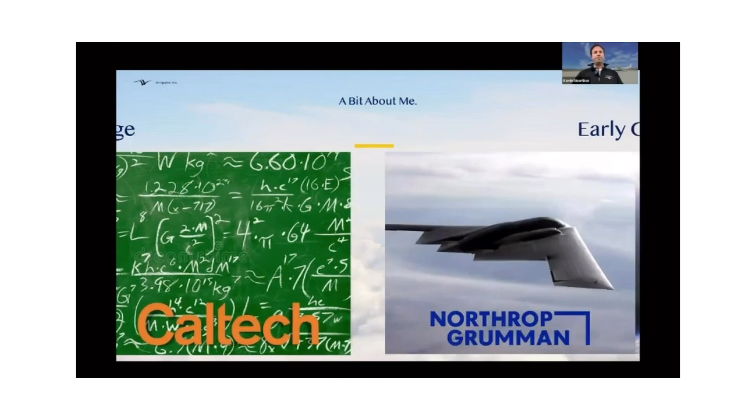As Panos mentioned, I started my career at Northrop Grumman. After doing research at NASA's Jet Propulsion Laboratory, Northrop invited me over to do stealth technology work. Think about the B-2, but 30 years more advanced, the types of making airplanes invisible. It was magical, like Arthur C. Clarke's laws of technology, indistinguishable from magic because it is so advanced. I loved that. It was a great place to start, a lot of responsibility. But ultimately, I felt it was a little bit too niche and limiting to where I wanted to be, the impact that I wanted to create on the world.

After turning into a program manager and exposing myself to the space side of Northrop, I decided to start a company, which was 9 years ago that we started Ampaire, and is still where I today am the co-founder and CEO. Ampaire has a big vision for the future of aviation, the future of sustainable flight, and I've got some very strong opinions on how we're going to get there. Currently, the company has a good 9-year track record for executing on that.

But it all starts with, the Simon Sinek, like the why. Why are you doing something? I think it's really important to find those core values in life, those things you're willing to commit yourself to in spite of the world pushing against you, because that's where you have the resiliency and the tenacity to actually get through the hard times.

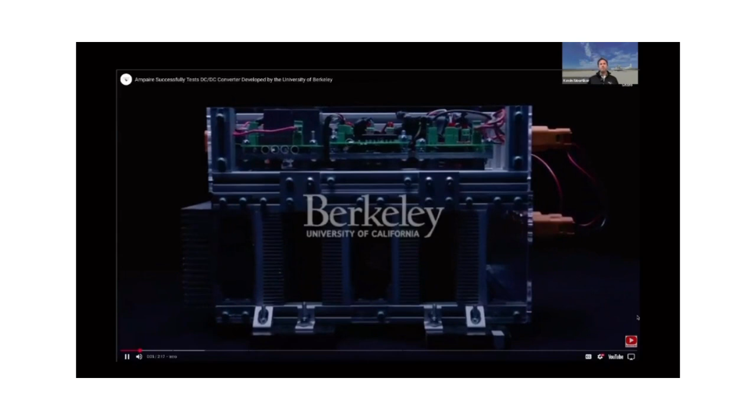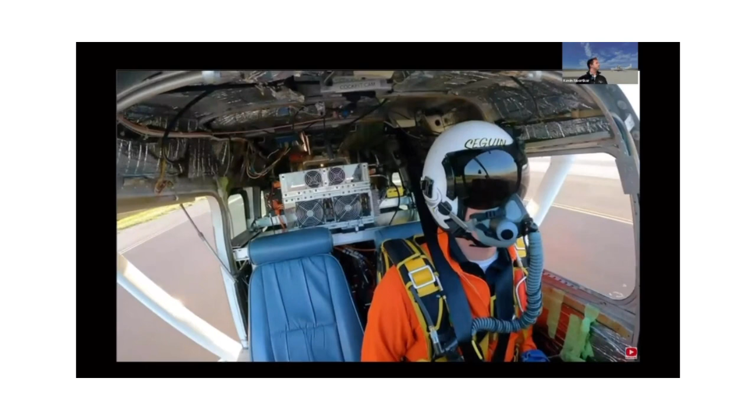Programs like this are really important for Ampaire because as a leader in the industry, we really take seriously our role in advancing the state of the art for technology. With our flying test bed, our Cessna Skymasters, they're reconfigurable, so we can rapidly introduce new technologies into those propulsion systems and allow the increased technology readiness level through demonstration, bringing tech from the lab all the way through flight. In this case, we've partnered with UCB looking at a DC-DC converter.

This converter enables us to condition the power on the airplane and provide lighter weight electronic systems across electrified aircraft. These kinds of projects are really important for the industry and for Ampaire. At the leading edge of aviation, we're taking electric vehicle technologies and applying them into aircraft in ways they've never been used before.

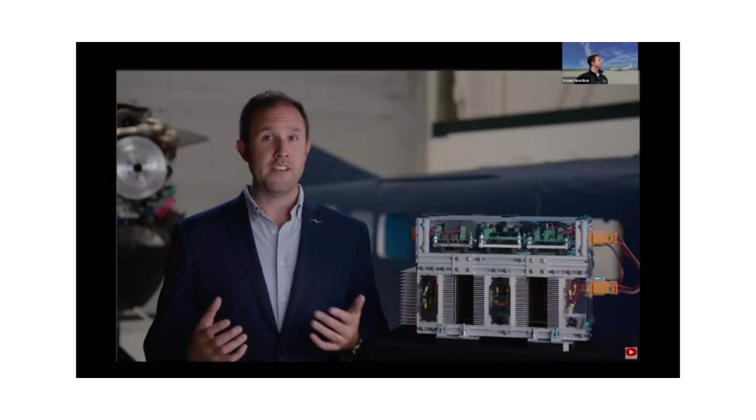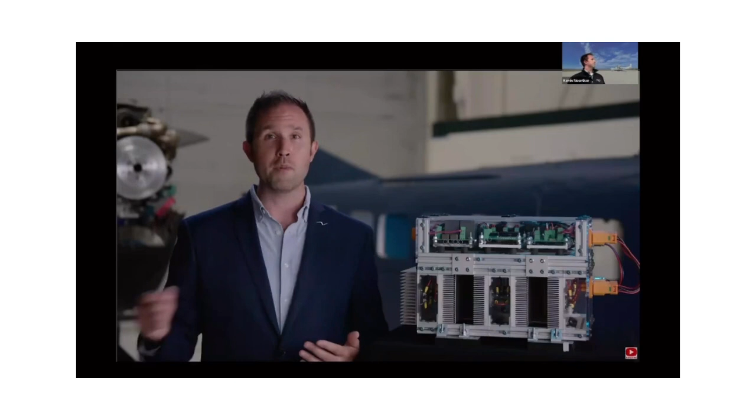This comes with a lot of challenges. Some of those challenges are about bridging the gap between the state of the art and aviation flight ready. This is why it's so important for us to have a flying test bed where we've partnered with the Department of Energy, ARPA-E, enabling new technologies to be flight tested through our system. Our aircraft is reconfigurable, so we're able to take power electronics, batteries, motors, software systems, even de-icing systems on the wing—new technologies uniquely enabled by electric vehicle systems—and mature them across the board so that they can become ready for commercialization too.

As Ampaire looks at the future of aviation, we know that we're not going to be able to do it all on our own, and we need to build and support an ecosystem of innovators to come along with us. We're excited that UCB was able to fly with us too, and that's just one example of a project we're very proud of. This idea of partnering with the ecosystem, being part of it, is also part of why I'm excited to be here. It's about reinvesting our energy into the next generation of technologies, the next generation of the workforce, into the next generation of startup companies bringing new tech and solutions into the world. I think everything we do is built in context, and the more we're able to interconnect and support, the better the world will be.

So clearly, I think deeply and broadly about the future of flight, and a lot of people do. Many of my peers in the industry, some of which you may have even had the chance to meet, will agree on this idea of let's build a quieter, a cleaner, a more connected and lower cost future for aviation. It's like an amazing dream that a lot of people share.

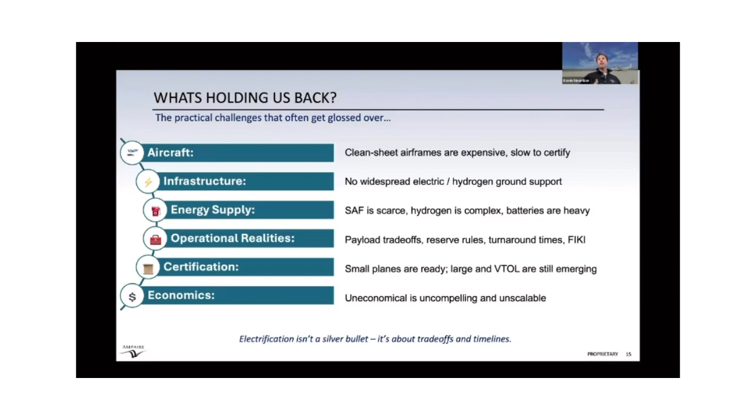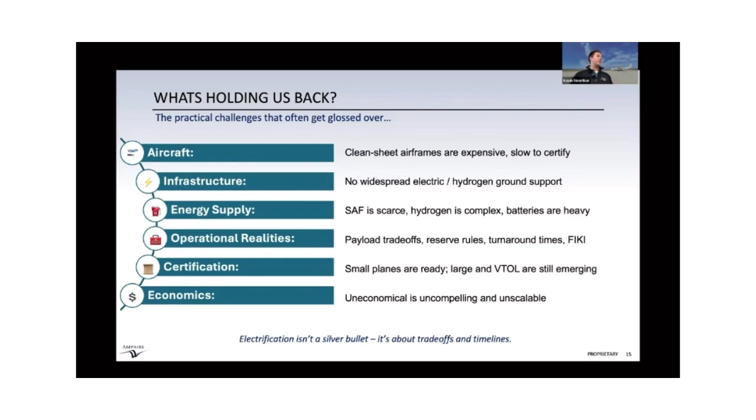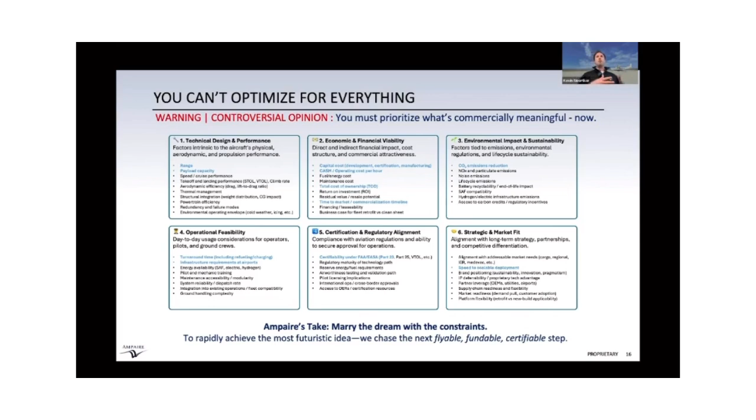And then finally, what are the economic conditions? Flat out, if it's not economically compelling, it's not going to scale globally. So some people look at electrification as a silver bullet, but we really see it as a set of trade-offs and timelines which need to inform a strategy. I have very strong opinions on the right way to approach things, and I believe it's important to prioritize what we can do today. It's important to ensure that aligns with where the future is headed, and that you're building a bridge to that future—but that you're not so enamored with the vision that you forget about the pragmatic real world steps that have to happen now. So we look at the future, but are always focused on the next flyable, fundable, and certifiable step across all of the factors you might optimize for.

And that's exactly what we see with hybrid electric aviation. We're excited about it because it can apply across all types of planes. In small planes, it looks like propulsion. In big planes, it looks like onboard auxiliary power. In all of these cases, you're able to save a significant amount of fuel, through the energy efficiency of the overall system and how it's operated on the aircraft. You're looking at 50 to 85% fuel savings, so it's transformative, especially given that fuel is airlines' single greatest expense.

Now, in the long term, there's some really interesting efficiency that can come with new airplane designs: distributed electric propulsion, vertical takeoff and landing, boundary layer ingestion—a whole lot of exciting things uniquely enabled from a vehicle architecture once you get the propulsion right.

When you get those efficiency gains, massive market expansion is possible. So lower cost leads to expanded opportunity. You can scale the market size, just filling in the blank space of where it's not economical today. But then you can also help commercial aviation continue to grow in a world-positive way.

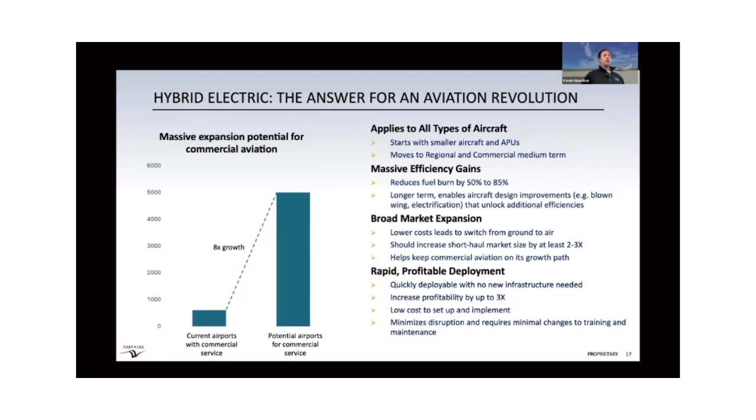That, plus the fact that there are no inherent limiters like poor economics or lack of infrastructure that hold back hybrids, is why we're so excited about hybrid as the gateway technology for the future of electrification in the space. And I wish I came up with the idea myself.

Aviation is not the first mode of transportation to go hybrid first and then transition to electric. We saw this for the first decades of electric vehicles on the ground, starting with infrastructure-independent Priuses and then scaling to other hybrids before you started to get your Teslas and Rivians and others that are now more common. But still today, if you go to rural parts of fully industrialized countries like the United States, you still won't have a plug within 100 miles of you.

What that means is that there continue to be real markets and real need for fuel efficiency, but in the hybrid application.

What's particularly exciting is that hybrids have been a gateway technology for the fully electric, whether it's the batteries, the power electronics, the motors, the software, the controls, or all of the built-in infrastructure around an industry. So the supply chain, the regulatory approvals, the maintainers in our industry, the pilots - these things are the inertia which ultimately enable you to carry from hybrids into a future of fully electric or hydrogen or wherever the future might lead.

So going one layer deeper here, not all hybrids are made the same. They're actually quite different architectures. So it's overly simple to say, oh, hybrids are good, because there's a wide variety. I'm going to go through a few different types of those hybrids, three in particular: an independent parallel hybrid, an integrated parallel hybrid, and then a series hybrid.

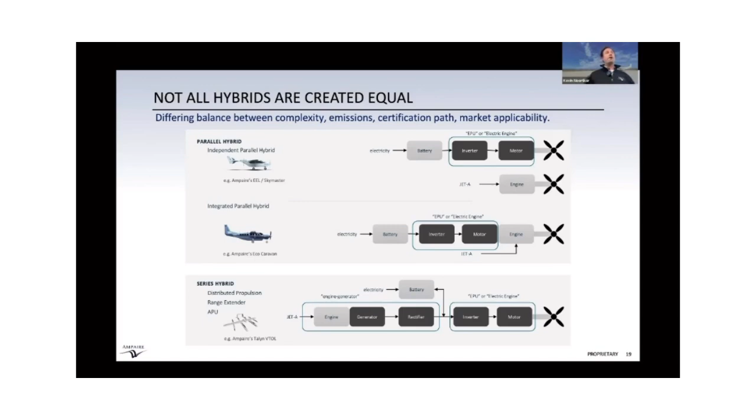But if you were to take those two systems and marry them together, now you have an integrated parallel hybrid, where both systems are providing mechanical torque to the output of the system - in this case, turning a propeller. But if you removed that propeller and just took that generator set, now you're actually able to use it as producing electricity or electrons that then can flow and be distributed for a whole wide variety of applications, whether that's onboard power, or maybe it's your vertical takeoff and landing distributed electric propulsion, blown air over the wing, or a lot of interesting configurations with planes.

When you're designing an airframe, and maybe someday someone here will be looking at building or designing or doing the trades on a new aircraft type, you'll probably be doing a lot of systems engineering, looking at all the constraints and interfaces. And that all begins with what the mission is - why am I doing this in the first place? Why should this plane even exist? What is the ideal architecture for that system? It's an energy optimization over the use case.

And then ultimately, each of these types of architectures is good for a different reason. Sometimes they're easy to retrofit into old planes, like how we're starting as a company. Other times they're great for distributed power. In certain cases, it's about a trade-off between the range the plane can fly fully electric compared to the amount of fuel it's burning with the hybrid system.

Taking that now one layer even deeper for these different types of hybrid systems, I'm going to walk through some cartoons on real world projects and how their hybrid propulsion systems are architected.

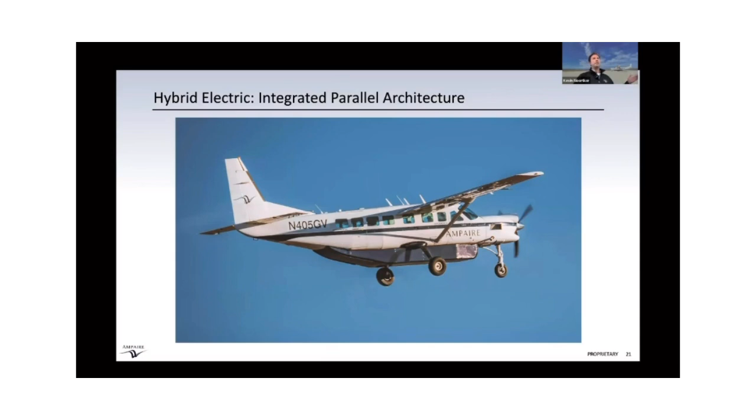The first is actually an Ampaire product. This is our launch product, you saw it in some of those videos flying. It's an integrated parallel hybrid architecture. What that means is we've got a jet fuel engine that directly drives the propeller, and an electric motor that also is coupled to that propeller for mechanical output. So you can add mechanical torque to the system with either of the two.

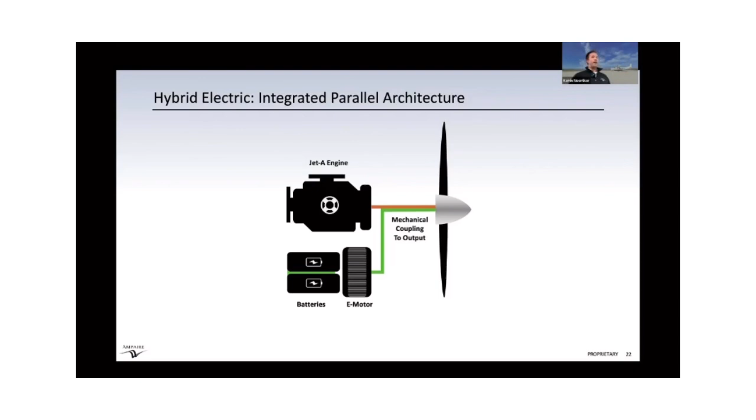What that means is that we've got a modest sized battery pack, and how this system ultimately works is that when you're taxiing on the ground, it's going to be pretty quiet. You're going to go all electric.

During takeoff, you're going to add power from both of these systems, the combustion providing this base load of power for the system, and all that boost power coming from your electric vehicle system. Think about a race car going off the starting line, or your hybrid coming off of a stoplight. Electric machines are great at that torque and that power boost up front.

And then during the balance of the flight, during that cruise phase, because you were able to tailor this combustion engine to be so fuel efficient just for cruise, not requiring the added power for takeoff out of the combustion, you're able to recover some of that base load of power to recharge the batteries during cruise, landing with a full battery pack, enabling a very rapid turnaround and a whole lot of utility, while saving between 45 and 50% of fuel over the course of the operation.

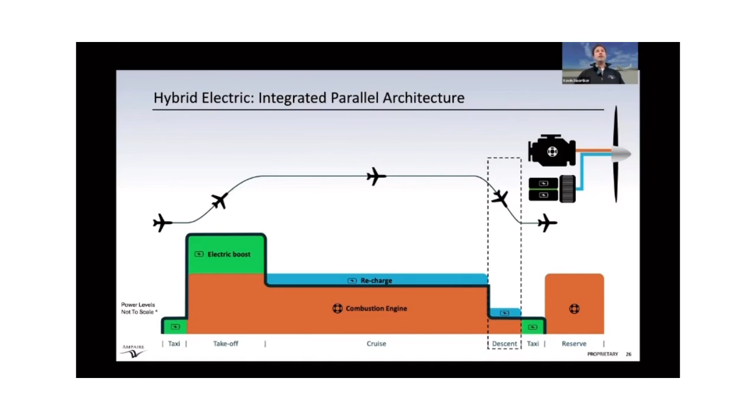So that's what we're doing at Ampaire, but it's not the only solution out there. There's another company doing primary electric with a series hybrid range extender feature. That company's named Heart. They really are leaning heavy into the all electric operation, and then saying, hey, we'll fall back on a range extender to give us a little extra power if we need to fly further.

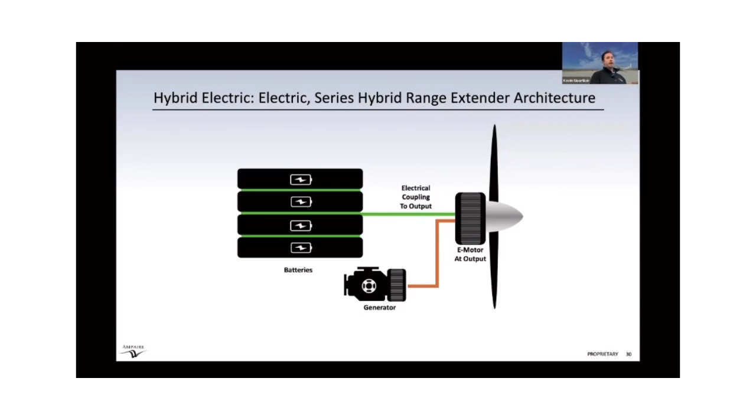So what this looks like is a giant battery pack that provides electricity to a motor, or multiple motors, that turn propellers directly. And there is a small combustion engine in there, but it's just used as a generator during the occasion that you need a little bit more power than the batteries can provide. So in this case, all of your nominal flight, whether you're taxiing, taking off, or cruising, is spent fully electric.

You're carrying that big battery, you ultimately deplete the battery. If you needed to go further, now you're using your generator to extend your range a little bit, and then you descend. Now the challenge they run into: one is that those batteries are crazy heavy, very challenging to put into planes. The other is that when you land, you need to refill the plane, and you need to refill it with electricity. That means you need charging infrastructure, grid upgrades. If you need to turn around quickly, you're looking at megawatt class charging infrastructure, which relatively exists but is challenging to get integrated at airports, and ultimately adds a barrier to adoption.

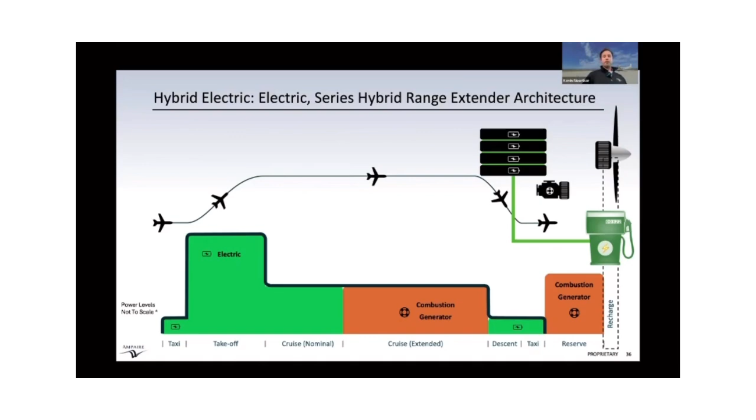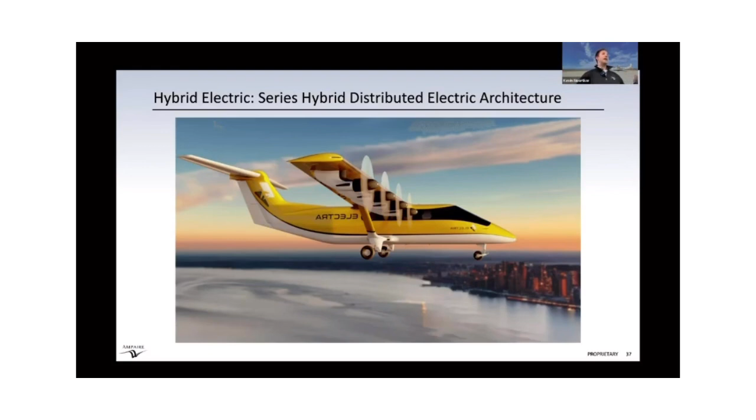The last hybrid architecture I'll go through is a series hybrid enabling distributed electric propulsion. This company's name is Electra Aero, and they have a clean sheet design plane which has propellers all across the wing. It's very aerodynamically efficient if you can accelerate the air over the wing. So they're able to take off and land from very short runways with this type of feature.

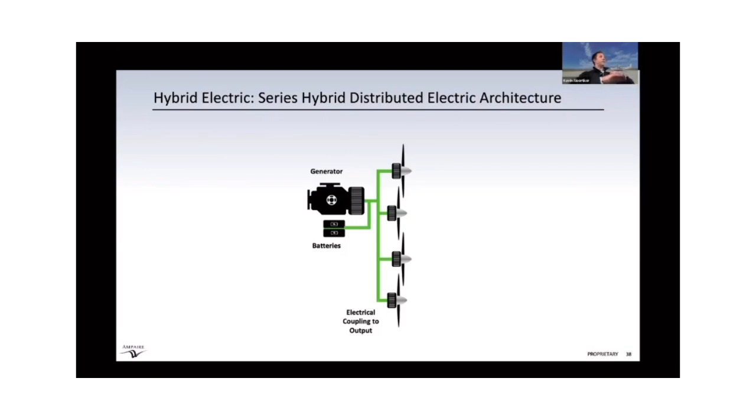So what this looks like is a primary generator as your source of electricity, with a little battery backup for when you need an extra boost, and those provide electricity to the distributed propulsion units across the wing. During this, you always have that base load of power from your generator, though instead of providing mechanical output like it did in the integrated parallel, it's actually providing electrical output the entire time.

During your takeoff phase you need a little bit of extra boost, so maybe you're pulling from a battery pack there. And then during the balance of flight, maybe you're recharging that battery pack, landing with a full pack, but primarily using your generator for your series hybrid architecture. And then at the end of the day, this type of a plane might not need to plug in as well.

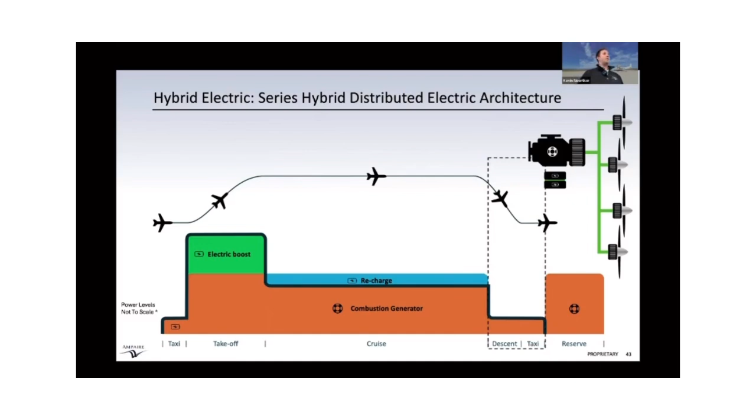So those are three out of what are probably 6 or 7 common architectures that you might see being used in aviation, mostly in concept. But one of the things I love about Ampaire is we're far beyond concept. We've been at it for nearly a decade now, and we're flying the world's largest fleet of hybrid planes. We've done these different iterations, explored these different options. So now I'll deep dive some of the other factors specific to our product.

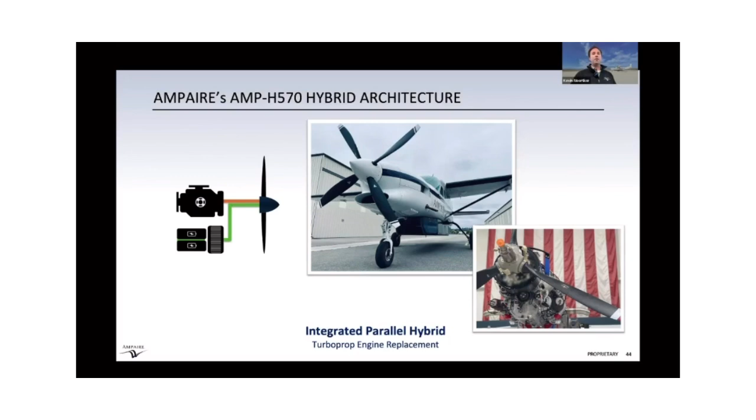Again, that's integrated parallel hybrid. This is a turboprop engine replacement, the first example I walked through. You can see it here, both as an aerospace company in front of an American flag, and also in the nose of our launch product, which is a Cessna Grand Caravan, a system that we've flown and are already operating.

So why do this? Why would our customers buy this system? Well, compared to the alternative they fly today, when they burn half as much fuel, they triple their profitability. These are businesses that scrape by with small margins in their operations. They struggle to stay in business because of how volatile fuel prices are and how challenging it is to make ends meet as a small airline operator. When they switch to our system, they triple their profitability. It's game-changing for them economically, setting aside the benefits for the world when you're burning half as much fuel.

So then they compare us, not just against the original conventional Jet A engine, but against all of these novel technologies which are coming out. They're making a decision: do I go hybrid, do I go hydrogen, do I go all electric? And ultimately that comes down to them not as a technology decision, though I love the technology myself. For them, it comes down to a decision on the underlying economics. Why go with one solution over another?

This has been really core to how we build the business: optimizing for the full economic scope of impact on our customer, not just how much electricity versus how much fuel, but looking at maintenance costs, looking at the vehicle cost. How much money did you pay to buy the plane, the propulsion system, to upgrade the charging infrastructure, to source all of the fuels? When you look at the relative impact, what they generally look at is their net income, but you can also look at your total expense, your capital expense to buy the systems, or your cost per available seat mile. At the end of the day, we did the trades in order to choose what was most economically compelling and viable to our customers.

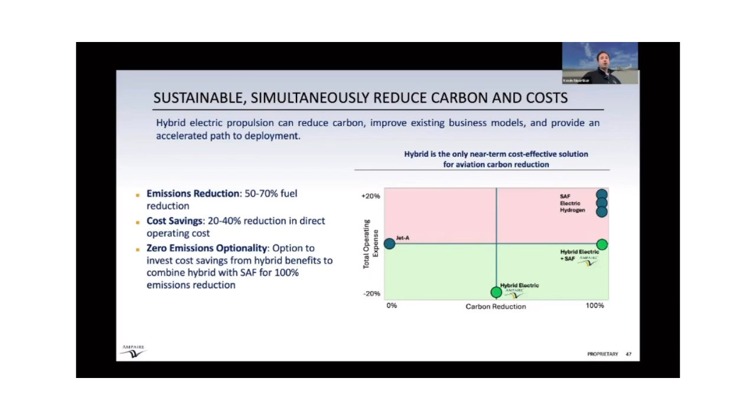But I also care deeply about sustainability, and some of our customers do as well, and they want to invest in sustainable aviation fuels. Sustainable aviation fuels are exciting, but they're a little expensive, and so while they might be zero or even negative emissions, they're hard to get, and you're paying an insane premium right now to get them. So what we're able to offer by burning half as much fuel is offsetting the cost of the fuel price, and then ultimately enabling net zero operations where you're using sustainable aviation fuel and hybrid together at cost parity to what your original operating budget was.

Safety is at the heart of aviation, and our customers, and anyone who sets foot in an airplane, some people take for granted, but we really shouldn't take for granted just how safe airplanes are. It is 1,000 times safer to fly on a plane than to drive to the airport. The numbers play out that aviation safety is just second to none. And when integrating brand new technologies, that's a consistent expectation: that when you bring a new technology, it must be at least as safe as what was already there.

This is really interesting from our standpoint, because as this integrated parallel hybrid, different than the other hybrid architectures, you have that combustion engine underlying the system and actually providing a direct mechanical output to the propellers. If you had the whole electric system delete mid-flight, you're still able to fly home safely on that combustion engine. Now that's almost like a letdown, you're like, but I want the electric to be more meaningful. But the electric gets you the opportunity to optimize that combustion engine alongside the electric boost and get this holistic savings.

It then gives you these layers of fault tolerance that were never possible in aviation before, which means that with this kind of a safety case, we can go to the regulatory bodies and show them that not only are we meeting the safety criteria that the original technology had, but by adding in the electric stuff, the things they might be afraid of, we're actually increasing the level of safety. This gets deployed for millions of flight hours and miles, and that ultimately turns into trust and data, which underpins every subsequent deployment of electric technology, not just in this first step of a hybrid where we were able to fall back on combustion, but eventually when electric is your primary safety.

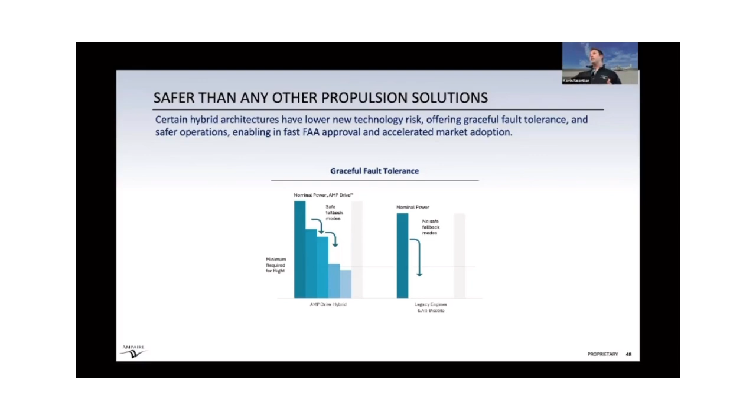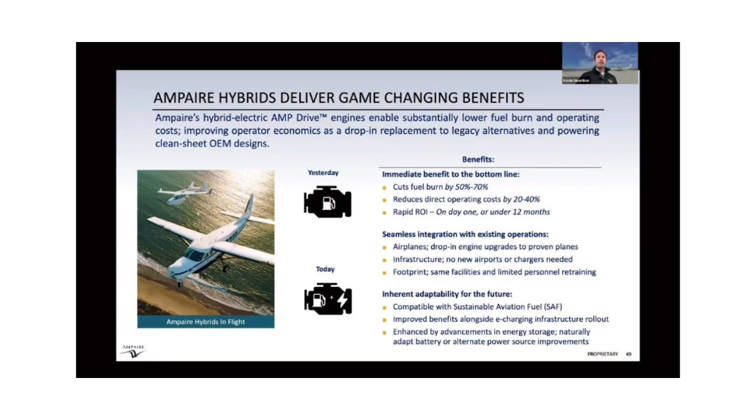I actually think the electric systems are going to be more safe than combustion, but it has to be proven. This is our chosen pathway, navigating all the constraints for proving it out faster than the rest of the world, building our place in the industry and market, and then enabling us to deploy the next generation of technologies thereafter. This is what we do. I think it's a great way to be spending my life, building these systems that support better economics and growth in an industry, bringing new technologies, solving audacious challenges that are sufficiently advanced to be indistinguishable from magic, and building a capability that's quite exciting for the future.

So a few places that we've taken this technology so far: we've flown 33,000 miles so far, hundreds of hours flown, demonstrated all the savings. The longest flight was about 1,400 miles, 12 hours.

I'll just highlight a few of the places where we've flown these planes. The first one, one of my favorites, is Maui. In 2020, we deployed on what's called an essential air service route. This community in Maui called Hana is served by government subsidized flights that provide essential goods. This is how doctors get out there, this is how critical supplies are moved. If you've ever been to Maui, people might say, hey, drive the road to Hana. It's beautiful, lots of waterfalls, takes about 2.5 hours, but only do it once—you just don't want to do it ever again, it's treacherous. That flight only takes about 20 minutes, so you're saving so much time. But right now you're flying at somewhat of a premium.

When you fly electric or hybrid electric, you're actually able to reduce the burden of those flights and increase the connectivity to communities like Hana that are around the world.

We've flown around the country. One of my favorite flights was when I flew up to Palo Alto in one of our hybrids, because, startup company, you got to raise money. So I was like, I'm going to drop into the airport at the end of Sand Hill Road, which is where all the venture capital investors are. I tell them, hey, I'm flying into the airport right there in Palo Alto. And all these investors—you want to know what they said? We have an airport in Palo Alto? No one knew it.

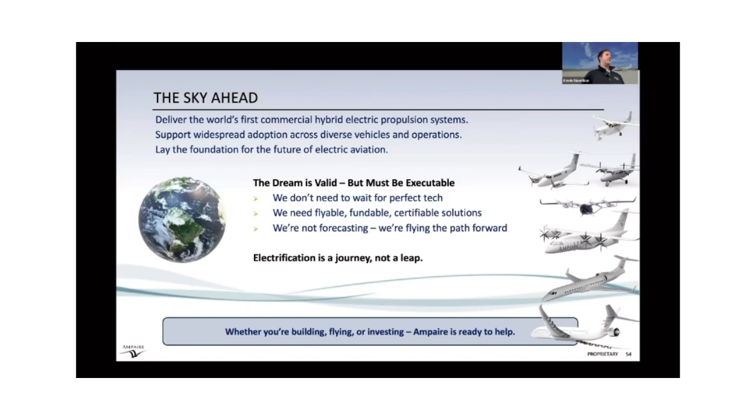This is just the beginning of where I see the industry and where we see the company going. Our goals coming up soon are to deliver the world's first commercial hybrid electric propulsion systems to support widespread adoption of electrification, starting as hybrids but then going elsewhere, to lay this foundation for the future of growth in the industry. I think big dreams are valid. I dream big dreams, I ask what if, but I also think you need a plan that's actually executable in the interim, and that it's a journey, not just one big leap.

So in the last few minutes that I have here, I'm just going to zoom out a little bit. I went through a bit of my own background, talked a bit about the company, got into some technical details, and talked about the optimizations that we made and why.

There are decision points that we face through life. This is like putting myself back 20 years ago when I was just entering school as somebody who kind of wanted to solve the theory of everything or maybe be an astronaut. And I was like, where am I going to go? I don't know.

So do I do physics or engineering? Do I do research or internships? Do I go into academia and get my PhD, or do I go into industry? Once in industry, it was, do you want to be on the R&D team, which is cool technology but not implemented? Or do you want to be on the programs where you're actually working on the vehicles themselves, the end use products? Do you want to be an engineer, or do you want to be management, whatever that means? So do you want to turn into a leader, whatever that means?

There are questions that you'll ask yourself over time. For me, it was, do I want to do airplanes or space stuff? Or what's next when being at a big company wasn't filling my bucket? And then starting a company, there's an infinite number of questions I have to ask myself every day.

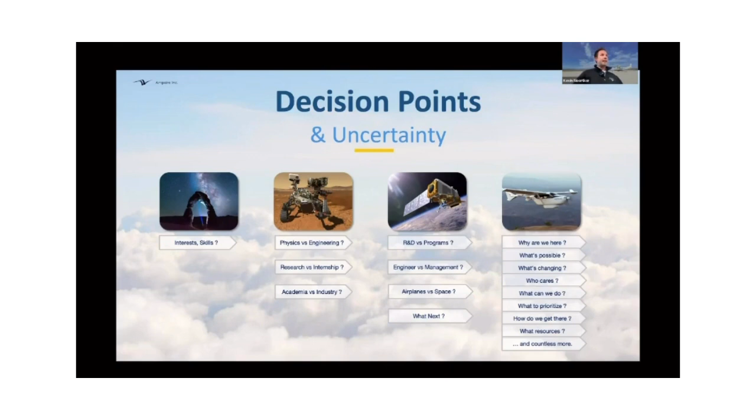Down to like staring at your hand, like why am I here and what am I doing, to like what's really possible, what's changing in the world around us, who cares about this, why are we spending our time given the constraints, what can we really do, how do I prioritize those things, because you can do anything you want in life but you can't do everything. How do we get there once you choose where to go, and what are the resources you need, and just infinite more questions. So you can't have answers to everything.

So you need to have good principles by which you make decisions. Your good decisions won't always turn out right. You'll roll the dice, and even if you've weighted the dice in your favor, or your coin flips 60% in your favor, 40% of the time, it's going to be not in your favor.

And you will then say, am I making bad decisions? I got it wrong. Well, if you're basing your decisions in life on good founding principles, then it's not a wrong decision, even if it didn't turn out the way you wanted it to. It's just the 40% that didn't play out, and that's expected in a stochastic type situation.

So you have to have core values. These are some of mine. They're not yours. You can borrow them or use them. But the reality is it takes introspection along the way to figure out, what do I want to do? Who am I? What do I value? So for me, there are 3 guiding factors as an individual.

I'm always looking for meaningful, challenging, visible work. We all have a very little bit of time here on Earth, and I'm going to have as big of a positive impact as I possibly can.

It better be meaningful. Challenging, because I'm always up for a good challenge, but that's also how you find the limits of the possible. There's a great quote: the way to find the limit of the possible is to dare to step into the realm of the impossible. Pushing that boundary is how you actually learn where the boundary is.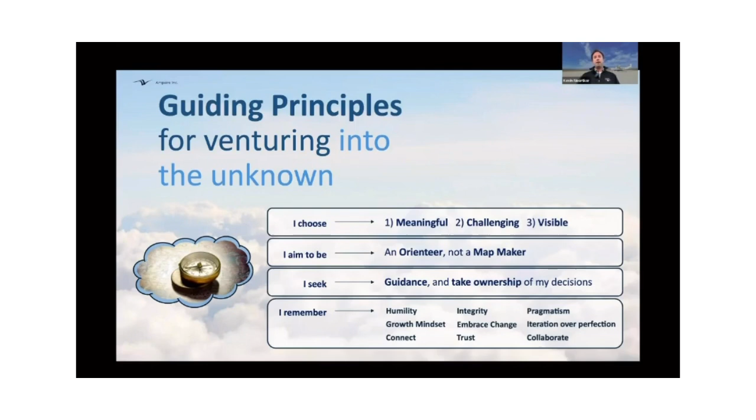You see it in the values of Ampaire, and in some of my own: humility, integrity, pragmatism, a growth mindset, embracing change along the way, realizing you have to iterate to get where you want to go, that you only get there together by building connections between companies and people, building trust and collaborating. With that, I've only covered a sliver, but I'm out of time. So thank you all very much.